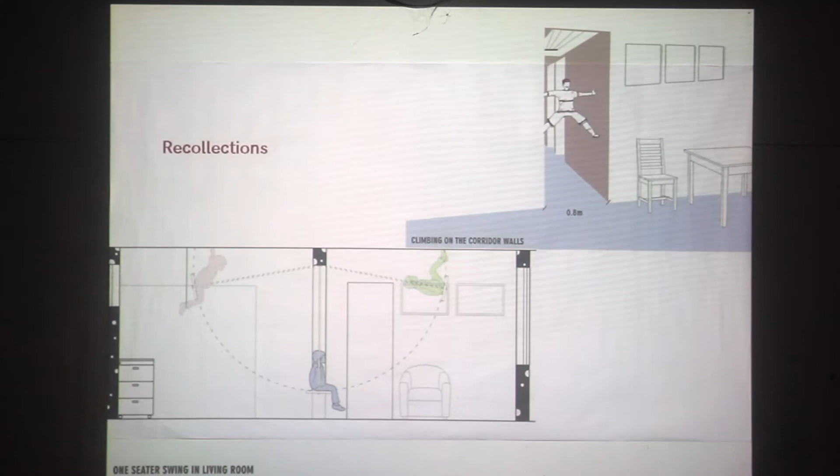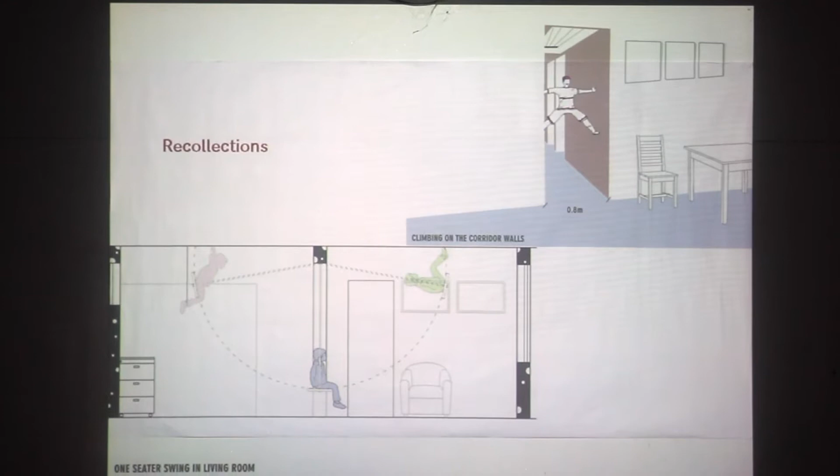From my own recollections, connection of the living room to other spaces is really important. The first one is climbing on the corridor walls, there was a corridor between the living room, kitchen and bedrooms. I used to climb on the walls of the corridor, and some people used to go under me, and it was fun. This kind of activity can happen if we provide a corridor, for example.

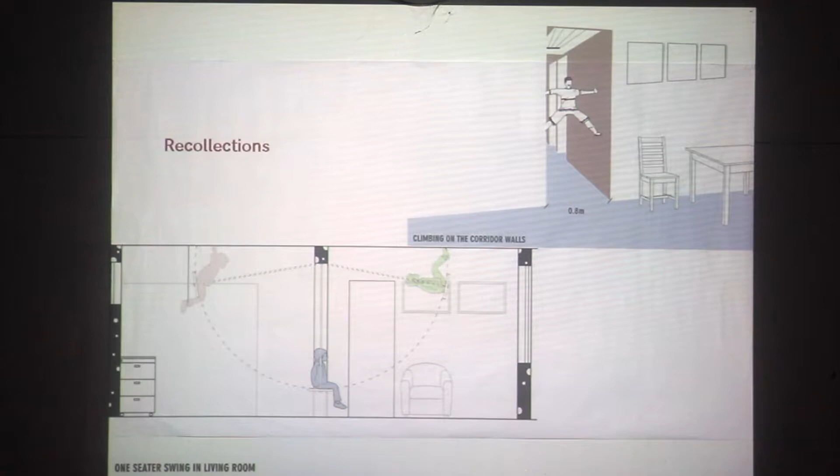Then there was a one-seater swing in the living room. I used to touch the ceiling with my legs and my hands. So if you provide that kind of space where only a one-seater or two-seater swing can fit, that's upon the architect's decision.

The method I took is that 3 types of houses are taken, and what all activities are happening or can happen in them is studied. The design of the living room is basically based on the user itself, and the architect of course. But as an architect, what all activities we can preconceive, we can design those spaces so that the activities we thought can happen actually do happen.

So this is one scene. While entering the house, what all spaces should one see from the entrance? Accordingly, while designing, we can think about what all spaces should be around the living room.

So this is a house, an individual house where 3 people are living. If a stranger comes and stands at the door, what all can he see from there? Here the configuration of the washroom and the washroom door is such that if one person is standing there, you cannot see that person from the entry. So if somebody is just coming out of the bathroom after bathing, wrapped in a towel or something, the stranger shouldn't see that person.

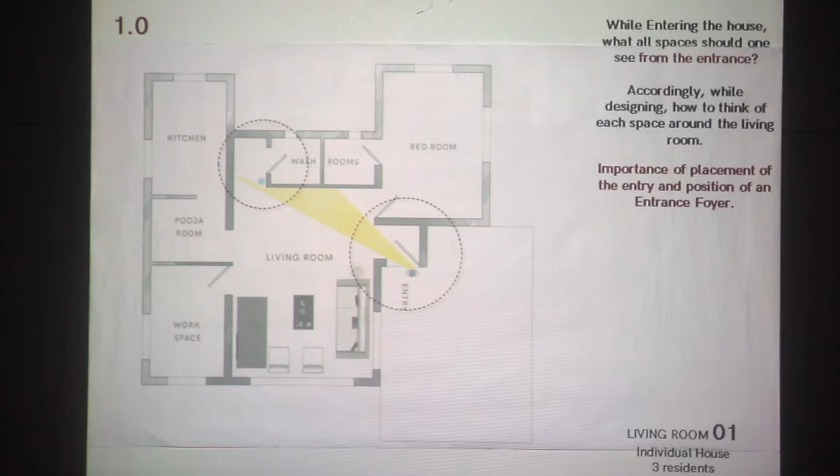So the importance of the foyer and what could be its size, it matters. So somebody is looking for his friend, and he was hiding behind that door.

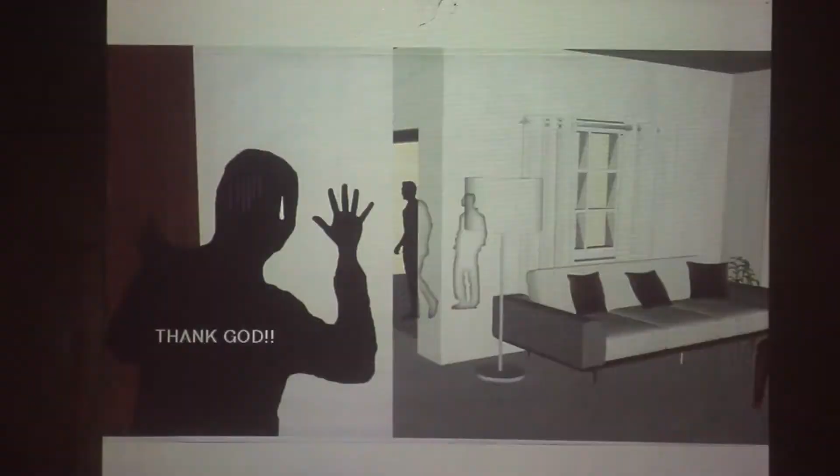What kind of spaces should be in the proximity of the living room? So this is an apartment, five people are living in it. If you see from the living room, what all spaces can you see? What all private spaces can you see from the living room? The configuration of those 2 bedrooms is such that you cannot see through the bedroom doors.

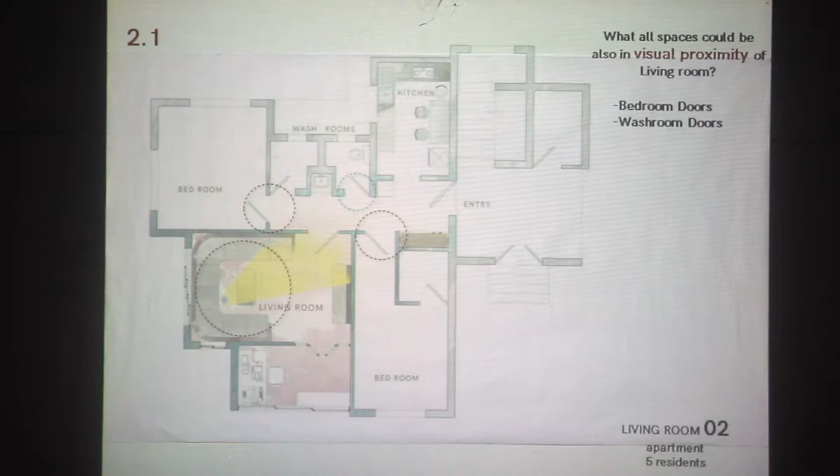But the washroom door is still visible from the living room. Another example for that: if you are in the kitchen and try to see into the living room, you cannot see it fully. I think that from the kitchen you should be able to see into the living room.

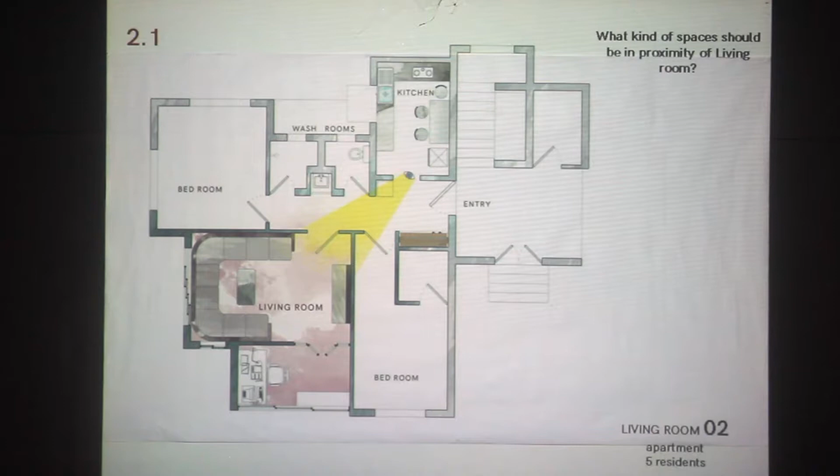So there is a scene. The mother kept her baby in the living room to play, and he started crying. But she cannot see him, so she runs, but the baby is not in the living room. She has to keep an eye on her baby, but that will be possible only if we change certain elements.

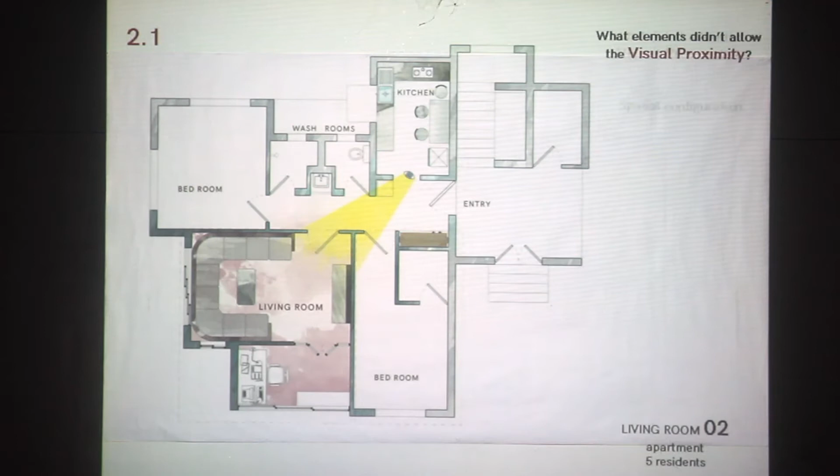So if we change the whole spatial configuration, what if we move the living room to where the first bedroom is, and move the bedroom to that side? That can be one solution. Also, we can modify this junction here. What if we remove it so the mother can fully see her child?

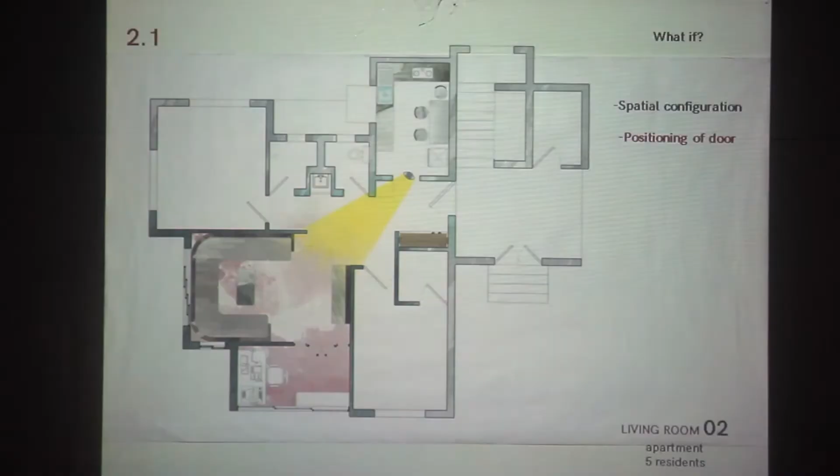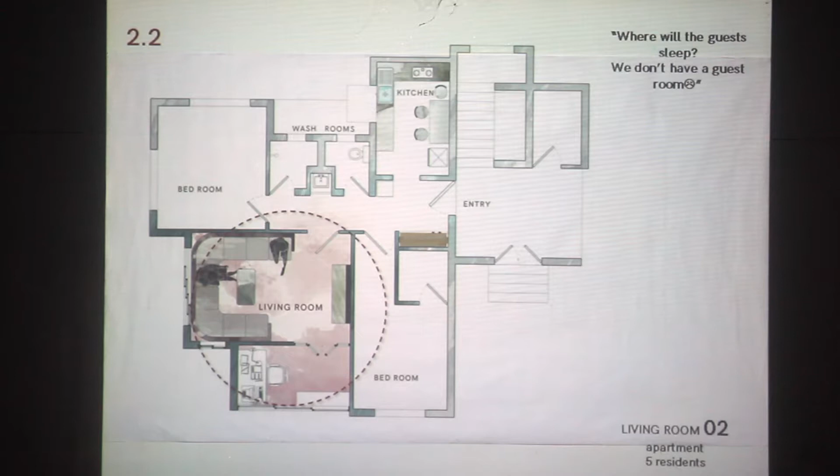Also, we have to think about what all activities can happen in the living room. For example, guests are coming and we don't have a guest room, so they will sleep in the living room. What all can we think about? What furniture can come there, and what will be the empty space, so that they can put their beds and sleep there?

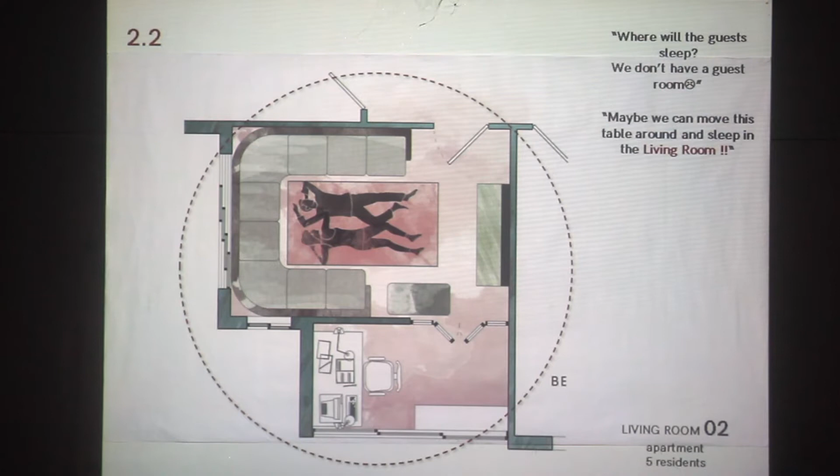So what if this is an existing furnitured living room where you can move this table and sleep there? Similarly, what all furniture layouts can we think about for the living room so that people can sleep there?

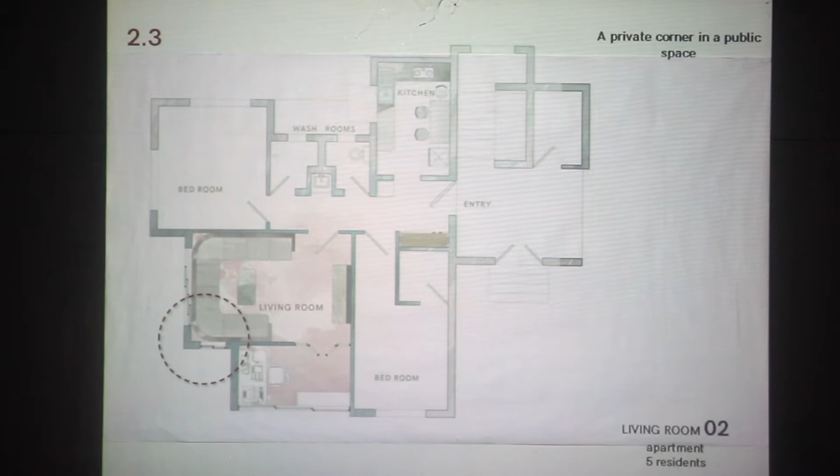I think there should be a private corner in the living room, where you don't feel fully private but also not fully public, since the living room is meant to be public. So if I'm sitting there reading a book, I don't want to be separated from others, but this corner forms that feeling, maybe because of the window or the sofa placement, or it can be anything. There could be more examples, but these are some private corner examples, like window niches or a separate corner.

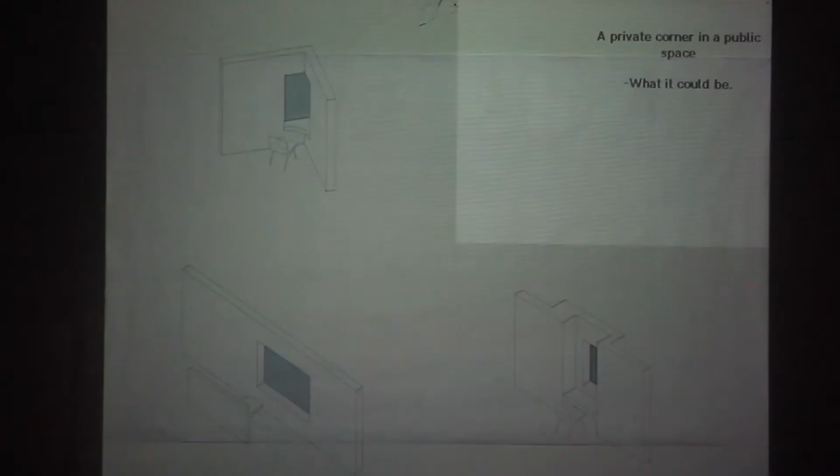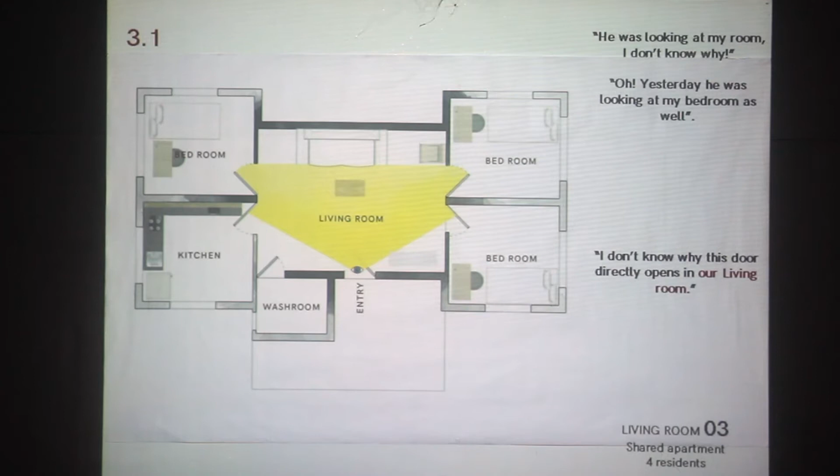In the same apartment, they don't have any windows in the living room, as you can see here. They have skylights instead because it's on the top floor with a pitched roof. So what if they want to talk in the living room but don't feel quite open about it? In the kitchen they have windows, so they might go sit on the dining table there and talk.

There are particular activities which happen in the living room. For example, because of this window design, that space now belongs to a grandfather in one of my friend's places. He keeps things there like a calendar, his specs, a bottle of water, and he can see outside all the trees and cars. He sleeps there, he sits there, so that is his space now.

Similarly, if we can put lower heighted windows, then people can put gaddas or khats there for old age people.

There is one small concept of secret or hidden spaces. What happens in a bungalow, an individual house? There are spaces like a backyard or a veranda which we do not find in apartments. If we are in apartments, we don't think about those spaces, but if we are in a bungalow, we are not consciously thinking about those spaces either.

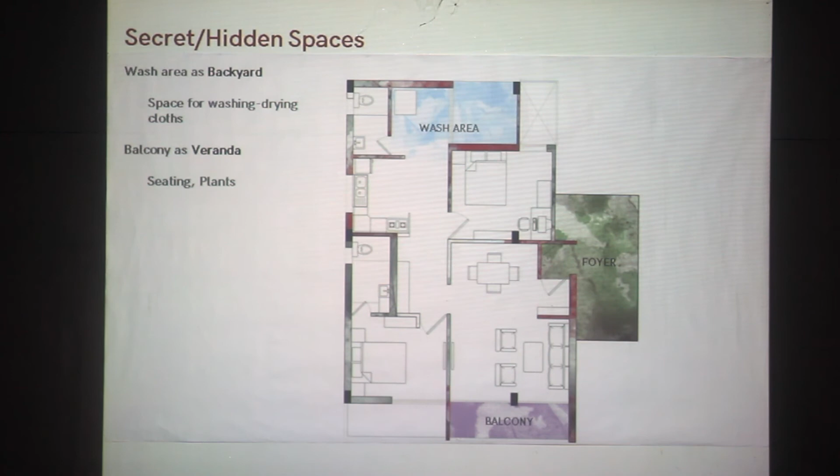So what if we make that space a veranda instead? These spaces are connected with the living room, for example this balcony, and also the entrance foyer. What all materials can we put there? As we talked about in the last lecture, we can put grass in the foyer so that the feeling of entering our own space arrives, and think about what can happen in the balcony so that we can open up and make a larger living room out of it.

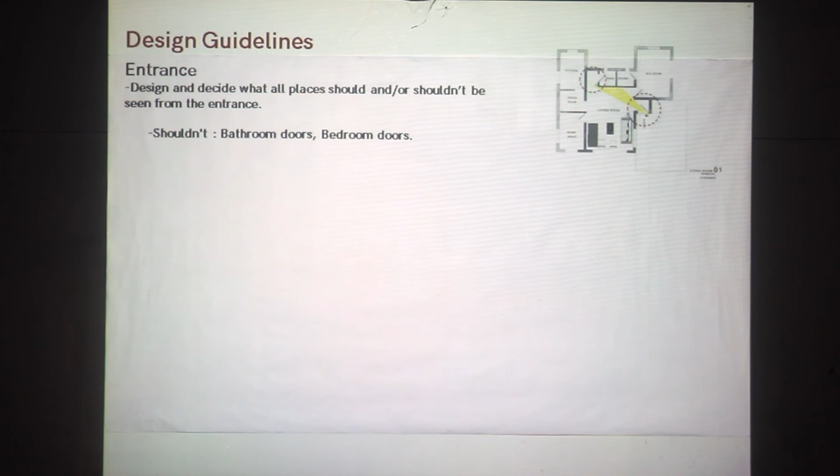Do we want our balconies like this? So from all of it, what did we learn? We have to think about the entrance space, the foyer, and the spaces around the living room, like the bathroom and bedroom doors. What all spaces should be in visual proximity of the living room? Where will the guest sleep? We have to think about the furniture that can come there so the guest configuration can happen if there are fewer rooms or no guest rooms.

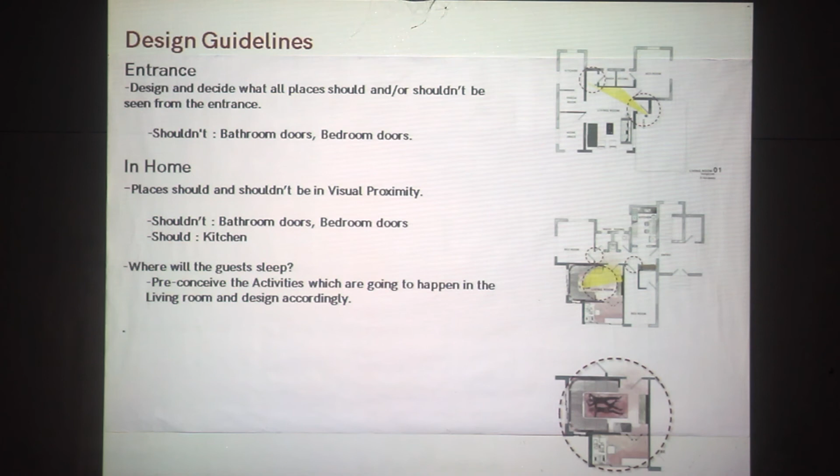So private or territorial spaces can be found within the living room. Thank you.